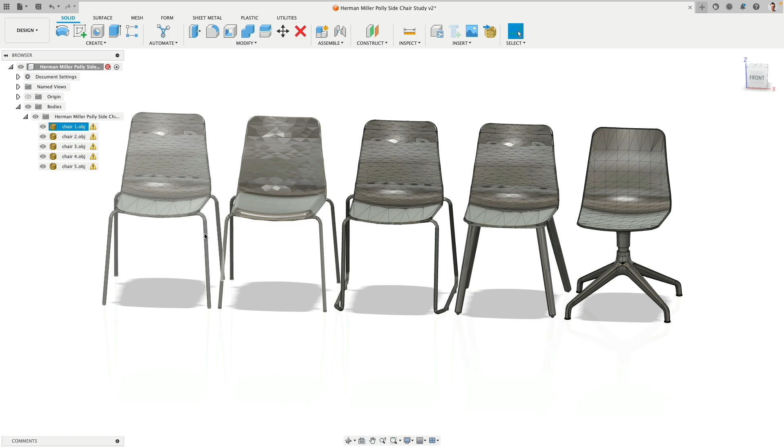We can see here we have, for example, a normal leg base, a sled base, a wooden dowel, a star base. And if we look from the bottom, we can see how all these elements are configured to be structurally sound.

These files I actually got from the Herman Miller website. They are available in different formats. I downloaded, converted them, and then scaled them down to the size for a child, in case you later ask yourself about the dimensions, because these models are smaller than the official versions.

To work along, the reference file is available and the download link is inside the description of this video. So please go ahead and download it. To open it, simply start Fusion, go to open, navigate to where you downloaded the file, and then you will see this. Perfect, let's get started.

So we will start with chair number one. If we look at it, the first thing I would do is try to study it. I'm paying attention to the legs. I can see the back one is less angled, the front one is more angled. They have rounded corners that follow nicely the curvature of the shell.

There's a curve, this is constructed, and we have rounded edges. The backrest itself, as we can see from this view, gets more narrow towards the top.

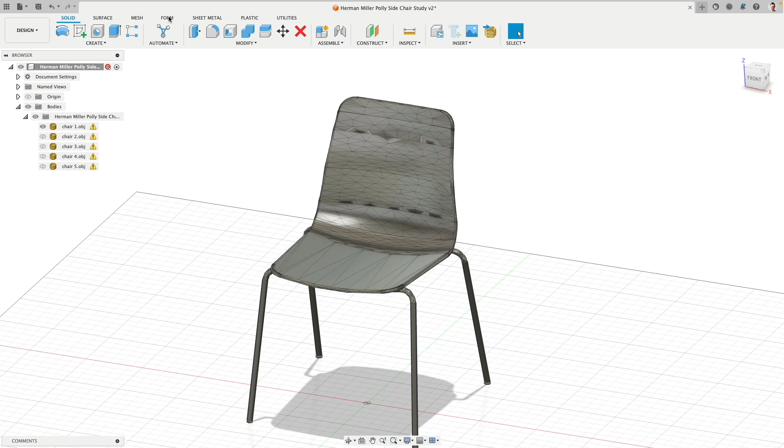This shell looks very complicated because it's very organic. It is actually very easy to create when you're using T-Splines or subdivision surface modeling. In Fusion 360, we have this when we are inside the direct modeling mode.

Now you can see the timeline is actually turned off. We can get this inside the Form menu. Here we are. We have all our basic primitives, some basic modeling tools, and then more modeling tools here in Symmetry. I will go over how to use all those.

So we will start with a plane. Think about this as a piece of paper, which we're going to extrude and bend into the shape. So we're not using sketches for this, we just direct-model that shell.

I click on this part, click on the bottom sketch, and then simply click on the center. From the beginning, I want to work symmetrical, so this is important. Drag this one out, how big this is doesn't really matter. Then left, right, I drag this to the left, and then this one to the right, so I just have one rectangle. You should see faces 1, 1, and okay, very good.

Perfect, then I can go to Edit Form. This is now the main tool to manipulate this geometry. We have various transform modes, coordinate systems, and do I work with a point? This is a point. Do I work with an edge, with a face, or can I select all at the same time? I would go with this one.

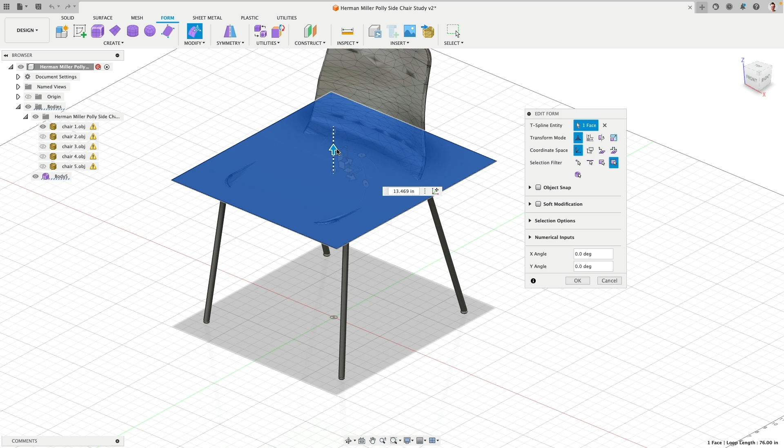So I simply click on this face, and then I can move this one up. There we are, and I bring this up to the front corner. Then if I go to the top view, you see here I can scale this. I will go to kind of like the width at the hip area.

Very good, now I click on this front edge, bring this back, click on this edge, and then bring this one back to here, kind of like. And then I go to a side view, roll this down. Okay, this one now actually can go up a little bit.

And you see how I'm trying to lay these edges and align this with the flow of that. Yeah, kind of like this part. Good. So now we have a nice, beautiful rectangle. How do we get this into this nice curvature?

The next step is very important. We go to a side view. On a Mac, it's the Option key; on a PC, I assume it's the Alt key. You have to press and hold it, and you see here there is a rectangle. This only allows me to move this point up, this point to the right, and this one goes up and to the right, or sideways at the same time.

So hold the Alt or Option key, then click and drag, and you see it drags a new piece out. I go to the midpoint here and release the mouse. I still hold the key on the keyboard, one more time, one more time. Middle mouse button, scroll up, one more time, and I try to release it there. Okay, now we can release the keyboard too. And there you see we extruded out this kind of organic form.

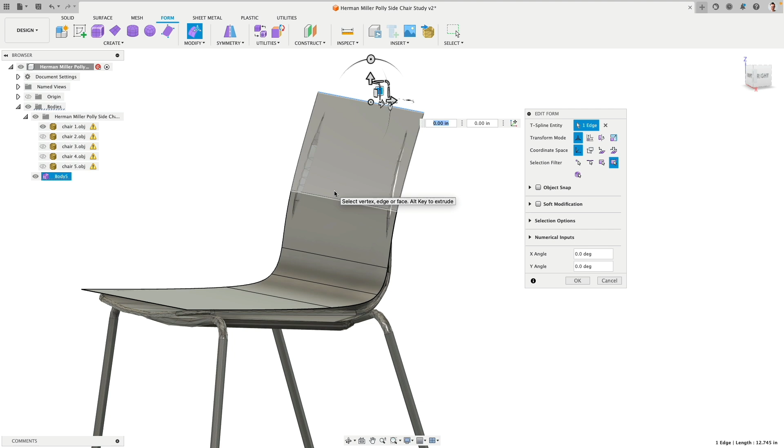That's the nice thing about T-Splines. Think about it like you're working with a flexible material which we can sculpt, like wire mesh modeling — this is actually what it is. Because we have all these edges, we can manipulate the topology.

So, for example, we see that this edge got a little bit higher, so I can select this and move it down a little bit. This does not really fully flow where it should be. So I go to a side view, and now what I have to do is push and pull everything and then reposition it till I get that flow I'm looking for. There, sometimes we have to move them up a little bit.

So it's kind of like a piece of plastic. Now, if you bend it, it always wants to de-stress itself, which is why I need to figure out where to put this. I'm going to make this arc a little bit bigger, and then here, this I will move up a little bit.

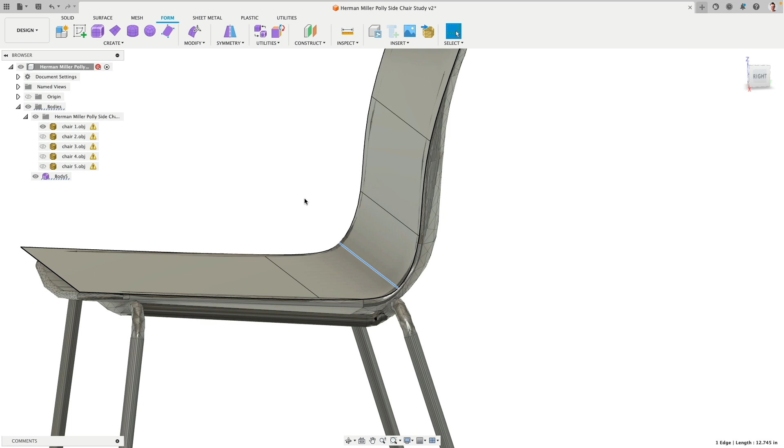Very good. When I select this edge, I can also press delete. Probably have to stop this edit mode, cancel it, and then press delete, and you see how this edge was removed. We can also add a new edge — insert edge.

Which edge do I have to select? This one. Wait, that's not the way. Here, there, okay, this thing goes that way. That's not what I want. There, okay, there you can see how we can now slide, cut a new edge right in the center there. And then you see how the whole geometry updates again.

So we can extrude new geometry out and by this create new edges on the fly. Or as you see what I did, we just simply add new edges on the go afterwards. Very good.

So I think we are pretty close to say this is actually really good. This would be perfect, for example, if we just want to have a very simple bent plywood shell. There is a thicken command — there it is. And that extrudes or thickens this. So we take the shell and give it a specific dimension.

We want to, however, create this nice curvature. How do we do this? Well, to bend, for example, this edge into this C shape, what are we missing? We are missing points here at the center.

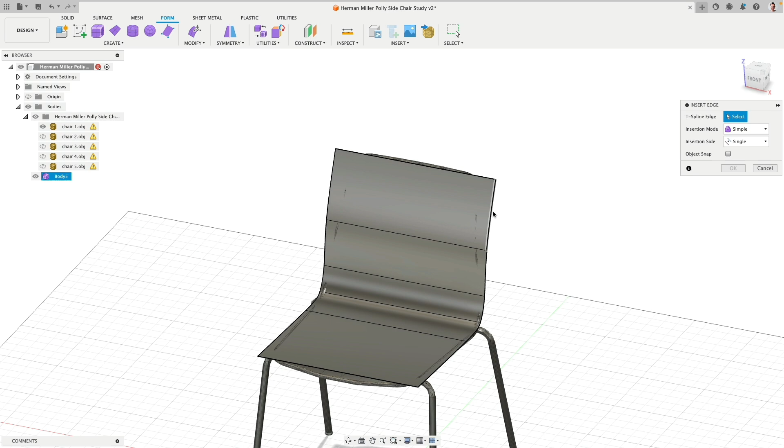So let's go ahead, go to Insert Edge — that's not the edge I want. I select all these edges. I think there we can click on all those. 50%, that's very important. You see, when I slide this, it goes from 0 to 1, so left or right, and 0.5 is exactly the center.

There we are. And with this now, I go back, select this edge, and just start pulling it down. And I can pull this point down, pull this point up again. So this will be a little bit of forward and backwards till we get that flow we are looking for.

Maybe this has to go down a little bit. Yeah, there we are — a little bit down, a little bit up. But as you can see, it's only a matter of some time and tweaking till we have really the result we're looking for.

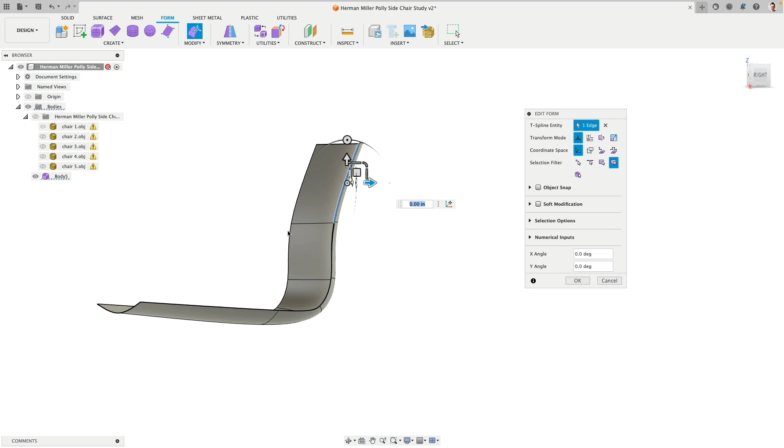Now here, these edges, for example — here I select these two edges, move this forward there. So now we are at this rim. Now we can pull this back. Yeah, okay, good. Maybe hide the mesh, then we can take a look at the design we have. It's actually not too bad.

Here's one problem with the topology. I'll move this a little bit more over to here, and maybe this over here. What I'm trying to do is make these edges perpendicular to their other lines. See, that's perpendicular, perpendicular. That helps later with having nice, even topology. The cleaner this topology is, the smoother and more perfect our surface will look later.

I'd say the shell is, in theory, good. What's missing is, well, as we can see, it doesn't really work perfectly. So now what we have to do is fold these sides over. The problem is I have to do this on the left side and the right side, which is a lot of work and can invite mistakes.

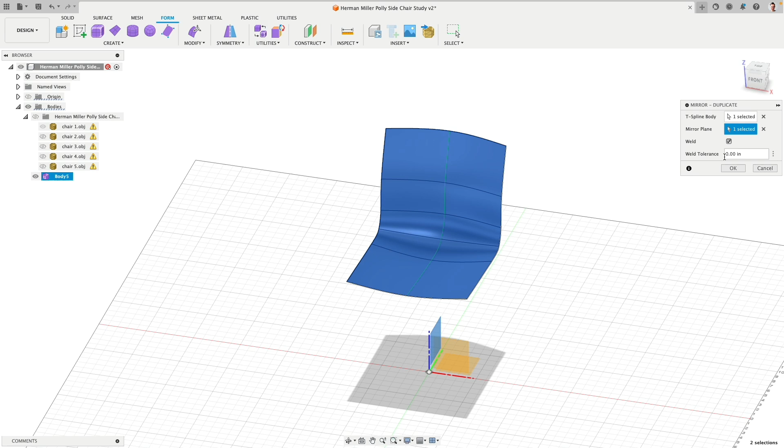So I'm selecting the edges here and pressing delete. Don't worry, we just removed half of the model. Then we go to Symmetry, Mirror Duplicate, select this body, and the plane is here. That's the reason I started modeling from the center, because this mirror line goes along this plane. We can also do a weld, so it's one piece, very nice. If you have a small gap, there's a tolerance to snap these edges together. Works really good. Click OK, there we are.

Because we have this interactive symmetry, when we select one point, you see the other point actually reacts to it. Okay, this is a line.

Instead of moving all these points in, I'll select all these edges and look from behind, that's easier to see. I want to reposition this pivot point, so now I can put this there. Click OK, thank you.

I am going to rotate this now. You see how all these edges rotate exactly nicely together. Very good, there we are. Cool.

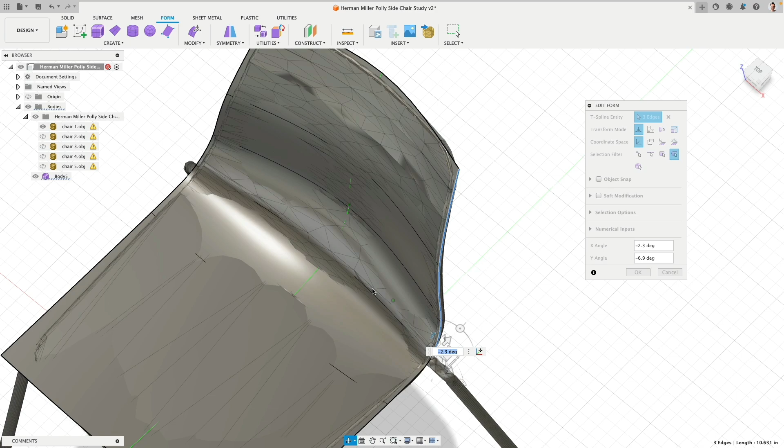This won't make the design follow the surface as much as before, that's good. Maybe a little bit of rotation here. Very good, yeah, that's good. This is our first time doing this, so we don't have to be super perfect.

Then here, this one I actually bring down and move forward. By bringing this down, you see I'm creating this C shape. Beautiful, okay, so we do the same with this one.

So reposition the pivot to there, thank you, rotate this, there we are. Let's go to a side view. Yeah, looks good enough. Maybe just a notch of rotation, and if this is too much, we can manually enter the amount. See, even half a degree has a good impact.

Beautiful, look at this. Such a complicated shape, rebuilt very easily with a methodical approach using T-Splines, doing subdivision surface modeling. This is very similar to the way you work in Blender, for example. It's just polygon modeling, to be honest. This is polygons? Yes, it is.

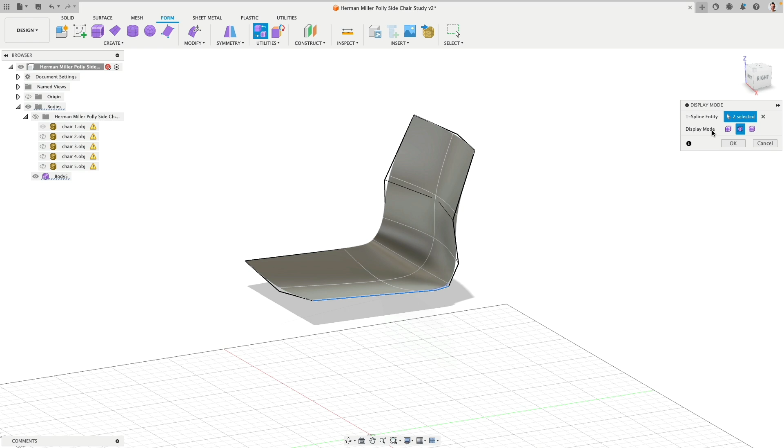If you go to Utilities, Display Mode, and click on this, we have three stages. That's a raw polygon model, this is what we built. Then this shows the smooth version including the original cage, and then this is the smooth display. Perfect. I switch between these quite often to make sure, for example, that lines don't self-intersect.

Okay, perfect. So what can we do now to build the shell? We folded this T-spline surface over the top of the chair, so now we can use that to create a solid.

We have the Thicken command here. I click on our T-spline surface, and I'd like to go to a quarter inch, or maybe 0.3 of an inch... 0.4. Now with this, you can specify how thick this material should be.

So now there we have it, nice and evenly thickened.

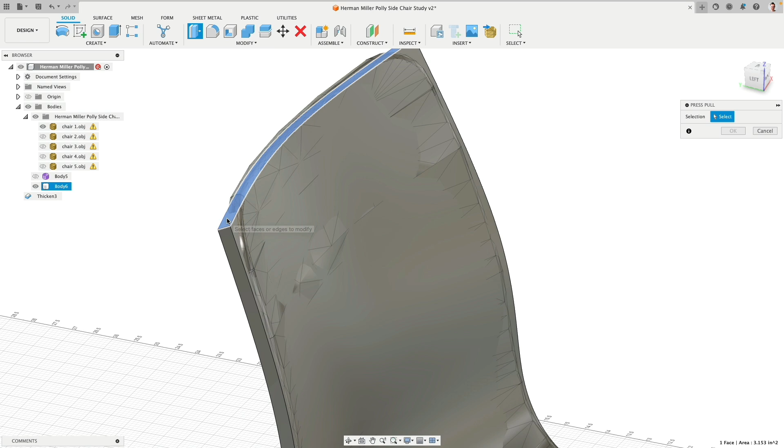To make this shell less painful, we can round these edges. I'm a little bit off here with that surface, so I can go to Press and Pull, select this face, and move it up a little bit. Yeah, that is actually good. Here, maybe... oh, hold on, what are you doing here?

Stop, I was still in that command. I didn't say this was okay. Good, I guess I can do this one more time. There, extend this a little bit. You see, this is very easy. Click OK.

We're actually very close. So to round everything, we select these 2 upper edges, go to fillet, and simply round it. We can pay attention to how big of a radius they have here, till it matches what we have. So it looks like 1.5, maybe 1.6. Yeah, it looks like 1.5 is what they used.

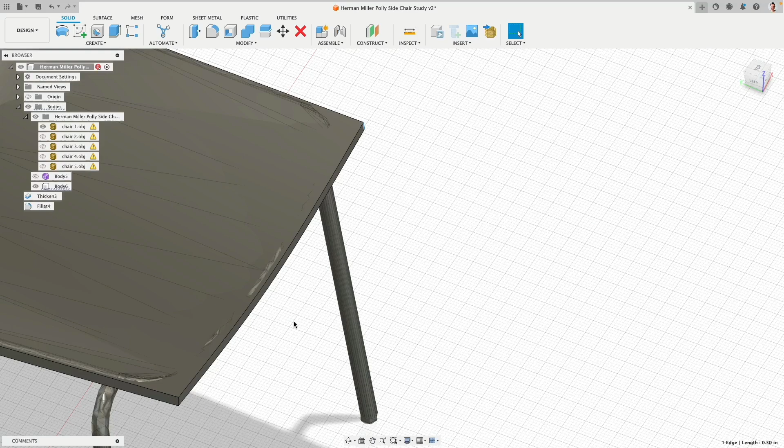Our basis, or our shell, is a little bit wider than theirs. That's not really a problem. Then we can go to the front and do exactly the same here. Again, select these 2 edges, fillet, and round this. This is actually bigger, looks like nearly 2 inches. Cool, okay, beautiful.

Now sharp edges, please. We select 2 edges. Tangent chain is turned on, which is why you see these closed blue loops. Maybe 0.125 divided by 2, enter there, like a really nice fillet. This looks good. Actually, our shell is done. There we are, look at this. This is beautiful.

Because we are in direct modeling, not parametric modeling, what we can do now is actually make a variation of this. Copy and paste. Maybe I would like to create a thicker version. So just for demonstration purposes, let's say we go with 1/2 inch of material.

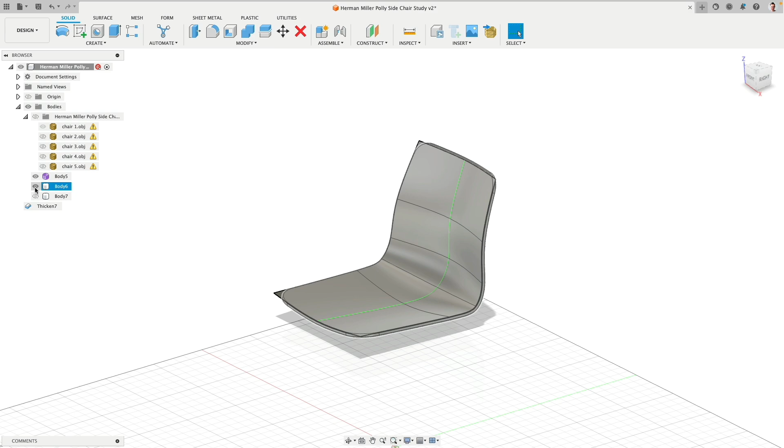And you see now, we essentially make a new model and we can compare these individual versions. We can keep this inside the design to kind of document what we explored. And if something is just not making sense, like this one, we just delete it, take it out. Very good. And then here, this one we can call seat shell.

Beautiful, okay. Now let's take a look at how we can do the legs. They might actually look very complicated. This is at an angle, this is at an angle. If we look from the side, it looks straight, slightly at an angle, and then there are arcs below which perfectly follow the seat shell, and then we have these horizontal pieces.

That looks intimidatingly complex, but in real life, I, for example, would select the shell and then take tubing and try to bend the tubing till it follows, for example, this curvature perfectly.

We're going to do exactly the same, just via sketches. I will show you what that means. Works very easy. In general, the way we work in the woodshop, or in the prototyping shop, is also the way we can approach 3D modeling, because in the end we have to produce this stuff anyway. So use the tools and methods and think about what the digital tools represent from the prototyping workshop.

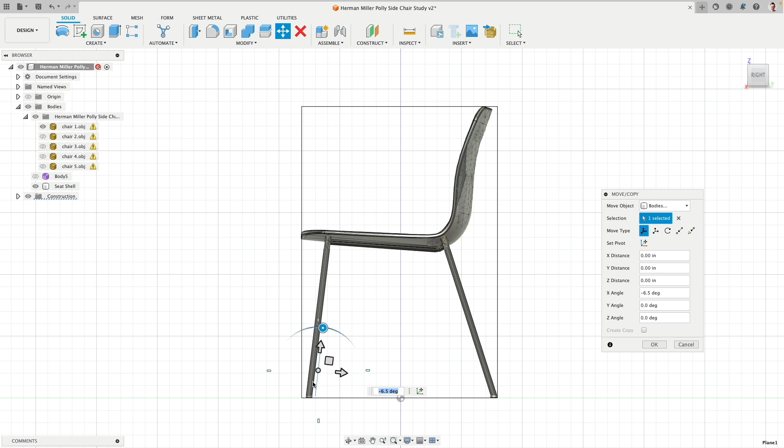Positioned it kind of on this edge, so I can see to what degree does this line up. Oh, this looks actually good. And then I try to center it there. Okay, yeah, that worked actually pretty good.

If I now select this construction plane, I can create a sketch now on this plane. You see, there we are. Go to the front view, and now I will try to draw here my line.

So roughly here, I would say, is the center of the leg. Then this goes down, plus or minus, to here. I make this a little bit longer. That's all good, and there we are. Very good. And I quit my sketch.

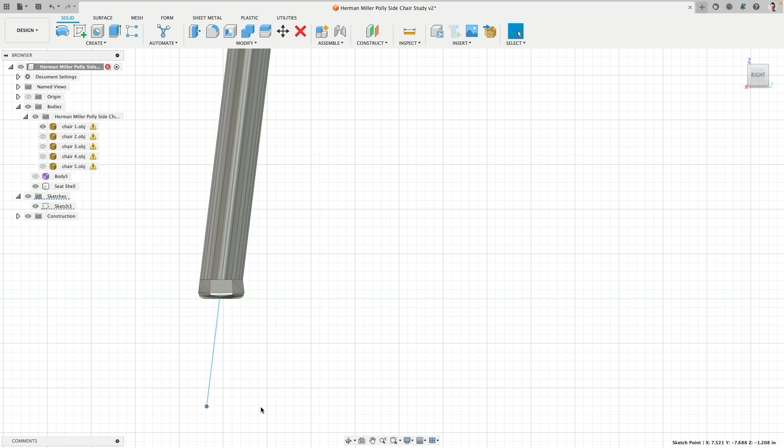I can go to the right side. I see now this is a little bit too low, so I can click this point, press M to move, and then I slide this one up, kind of like to there. We're not trying to work too precise, we're trying to work actually rather fast. And the main reason for that is I want to explore the ideas.

And then here, this one I extend up. I pressed M for the movement command too. So this is kind of like a line that's in the center of my leg. How do I do now the pipe below? Because later, look at this, we have here a pipe command, and I need to draw something that I can grow this pipe along.

When I go and edit the sketch again, we can see how this construction plane cuts the shell. Can I trace that? Now we do a lot of tracing in real life, and yes, actually there is something - it's simply called intersect. I intersect this plane with this geometry. Okay, and there is actually my thing I was looking for.

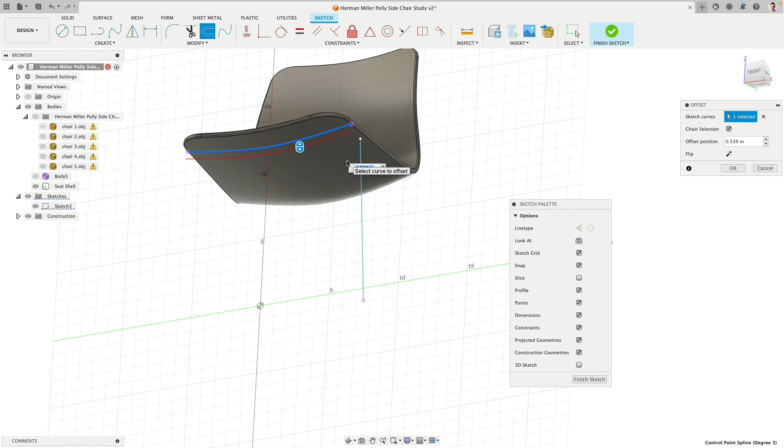Now the pipe, we're going to make 1/2 an inch. And this actually then needs to be offset 1/2 of that, so 1/4 inch. Is there an offset command? Yes, there is - there's the offset command for sketches. Can select this, bring this down, 0.25 of an inch. Beautiful.

Very nice. Okay, now I will take a look at kind of like where this arc later ends. We can see this, so roughly there. So that means I need to trim this line there. I'm drawing myself here a line just as a helper, plus minus there. And there's the trim command, so I use this line to just trim this piece off. Suck, cut. And this I can delete.

I can also, if I want to work clean, do the same there. So there, this is gone. And now this piece I do not want to move at all, so I select it and say fix, lock it. Also this point I don't want to move - there, I lock it. Okay. This is blue, so this can still move. Why did I do this?

Check this out. Here I will come in now with my arc command. Click, click, move this up. Click. There is a tangency, so this arc follows tangency into this line. And now I want this arc to flow G1 tangent into this offset curve. And when I click it, you will see - wow, what happened here?

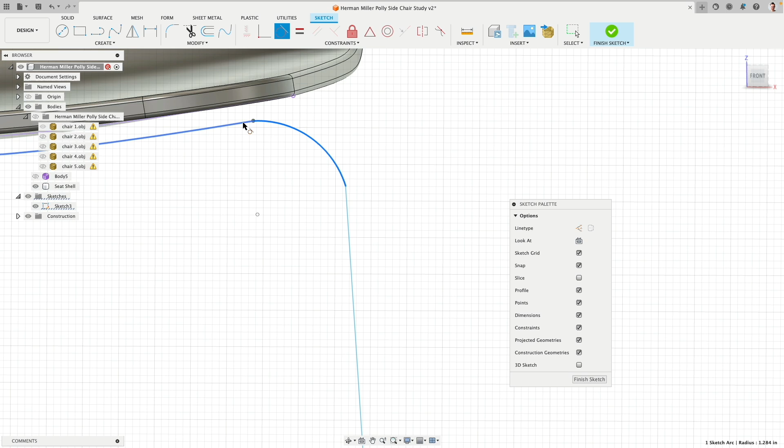Okay, let's delete this. Let's do this one more time. Sometimes Fusion can be a little bit cranky. There and there. Okay, didn't do it. Yeah, I love this when this happens. This is perfect.

Okay, maybe I try something else. Okay, I'm not going to re-record this and fix this because I think bugs are something that will always follow us. So it's good to show you how I solved that problem.

So you see how I drew actually the arc and the line, and then I established the tangency constraints. And can I now bring this down to this point? Yeah, okay, so this glued together, this line I can delete. There's still a little bit of a broken thing, so don't touch this. Okay, interesting, so there's still something breaking. I have an idea maybe why this is so.

First, actually, let's give this a radius. 1.5 - does this actually look similar to 1.5? No, it's actually maybe 1.25. Maybe actually it's just 1. No, this is too small, 1.1. I'm trying to pay attention to, yeah, there this ends. So this looks actually very similar. Goody, okay.

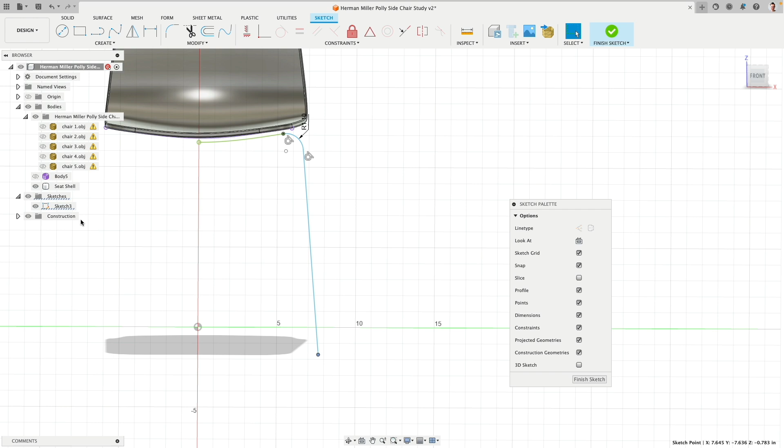So this actually still works, so I will simply do the following in this case. Now you see here this line is a little bit longer, I just repositioned it. Thank you, this is good. Okay. I leave the sketch, I go to a side view.

There you can see how this works. Let me show you actually another little trick. I will create a sketch. No, not there. So the sketch I delete. I would like to create a sketch on this plane. And then here I just make a line and I make with L another line, and they're horizontal and vertical, they're perpendicular, perfect.

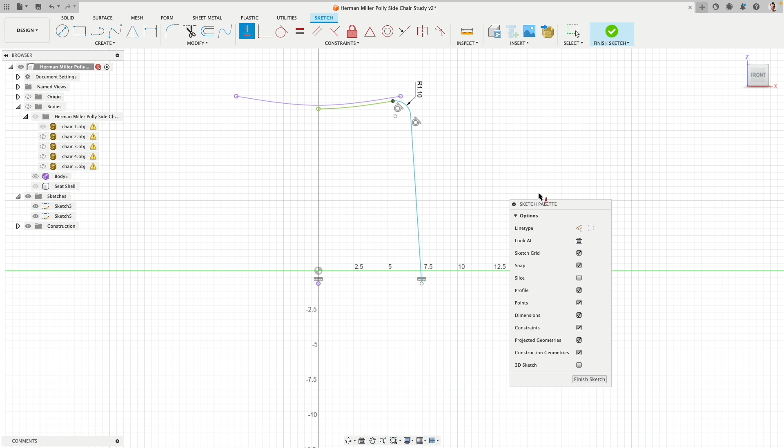So when I do this, it's actually very helpful, because if I go to the sketch for these legs there, you see that this is where the center point is, but this is where the ground is. Can I bring this in? Can I find an intersection? And yes, we can - so intersect this new sketch with that other sketch. Yes. And why is that useful? Because now I can say, hey, you and you be horizontally aligned, and that pulls actually this point right up to the ground plane.

And then all I can do is move this left and right to change the angle. Welcome to CAD - there's always multiple ways how you can do this. Okay, so this is done. Here's the pipe command, we can click on this. 0.5 of an inch - that shouldn't really cut. It's cutting there somewhere, or maybe it's just really touching it. It's fine - new body, flop. There we are, you see, easy peasy. And if we go to the side view, that's really nicely touching the ground.

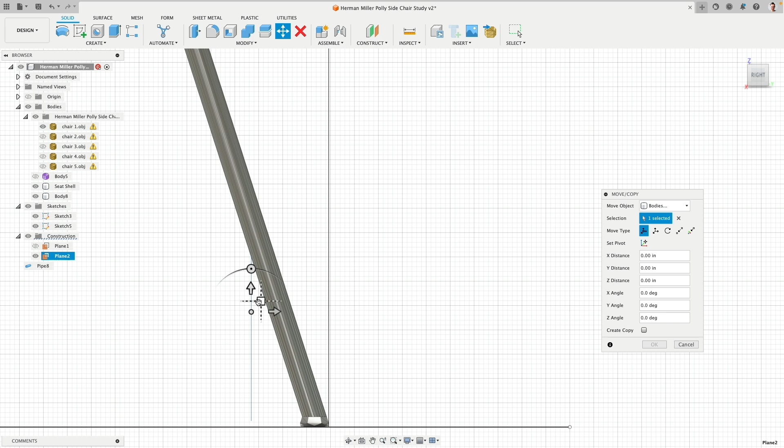Okay, let's actually do the back leg - same process. We can make a construction plane, bring that over. So now there's that construction plane technique we did. So make a new construction plane, this one, bring this over. Okay, then I can select this plane and from a side view, position it and rotate it. It's easier to see this on the outside.

Close, there we are. And then we try to center it. Okay, same deal here again. So I will create a sketch. I will from the beginning do also this intersection. Then now we need to draw this line, which goes to maybe somewhere there. Okay, very good. Since we have now this point, we can.

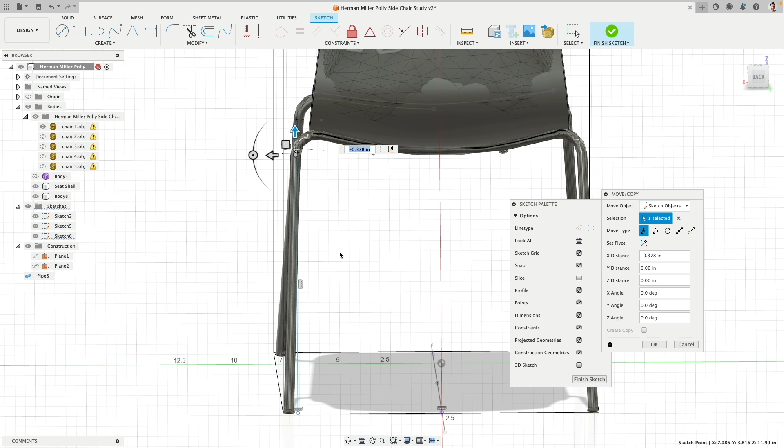Horizontally, vertically constrain it. With M, we go to the move command, bring this over. Very good. Press M. Now I'll move this over and maybe move this down. Oh, when I drew this line, I actually added a vertical constraint. It always just moved it left and right.

There we are. Thank you. Cool, okay, now we need the same intersection, tracing actually the bottom of the shell. There we are. And you noticed exactly same process. That's really the nice thing about 3D modeling. You need to learn how to create the basic shapes, and then basically once you master that, it's honestly just taking a look at what shapes do you have in front of you and how can you use the available tools to rebuild what you have.

Fix it, very good. There's now my arc command. Click, click, there we are. And tangency to that, let's see. This time it doesn't flip out, cool, thank you. You notice I wasn't really able to select the arc. I needed to turn off the mesh, turn it back on.

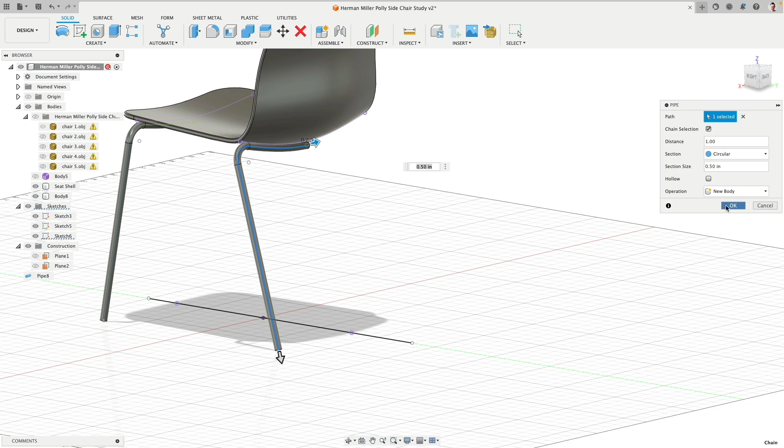1.25. Actually, 1.1, oh yeah there, let's go 1.1. That's all good, perfect. We don't want to rebuild. I mean, the goal is not to rebuild this perfectly. This is really more learning actually from these designs, how something was built. There we are, look at this. See, it's not very complicated.

Also, these legs that you see from the sides is all flat because it's going to be put onto a vise or system, and then we just bend them into the position we need. So these pipes don't go, they're not bent in along two different axes. It's just one axis only.

How do we do the connection part? That's actually very easy, same process again. Construction plane, this time I use this one, and bring this to connect the center. There we are, thank you. Now, and then same way, sketch on this construction plane, intersect this shell. Thank you, there, go down 0.25. There we are, and that's actually all we need.

We're not going to trim the stuff, I show you how we trim the geometry. Then we're going to shell this a new body. Now every engineer is going to laugh at me because it's exactly the same the dimension. No, the pipe, so diameter is the same.

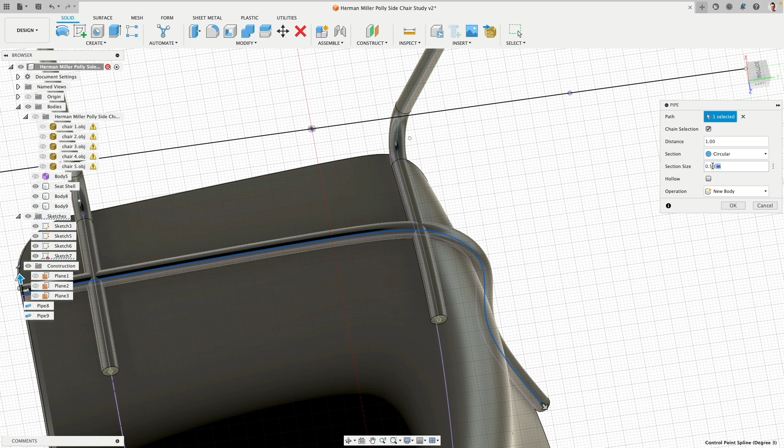I mean, we can do it this way. We're actually going to make this a tick smaller because you can see what will happen where these two pipes are meeting each other. So now this means if we actually make the pipe smaller, we can drill smaller holes into this lead pipe and then weld the stuff in it. If we make them equal, it's a little bit more complicated. Yeah, I mean, this is fine, it's all good, okay, beautiful.

These pipes I all dissolve. Very good. And the shell I hide. So now we have this system. I go to combine and join everything together. And then I simply do the following: to remove this, I select the faces and press delete. Thank you, direct modeling.

Look, it repairs it for us. Perfect. It's kind of like using an eraser. We need to mirror this over. There's the mirror command. There, and along there, and join. So it's one piece, thank you.

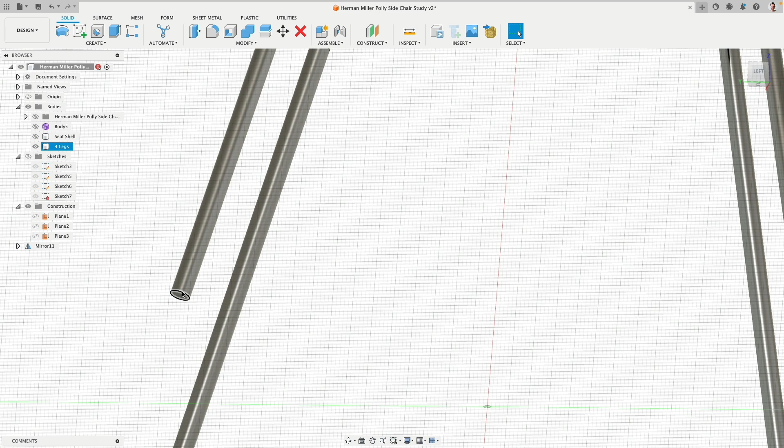Four legs. And the last thing maybe to do is we can select these edges and then do a fillet. We're simulating, for example, that there is actually kind of like a cap. Maybe 0.125, okay. And there we have it.

Now, so this was actually not really that complicated to do, because we have the shell and the leg, and the shell is done, so we don't have to do this for the other chairs. And the configuration we did for this leg, now we can just turn on and off, turn on and off. And this is now where, for example, the next step comes in very useful. So here I would like to, for example, create an upholstery, no?

So how is that possible? I turn the shell off, and I'd like to see this, and then I'll go to the thicken command. I use this, and I'm pushing this up till, let's say, it goes over kind of like that part. Okay, that's kind of okay.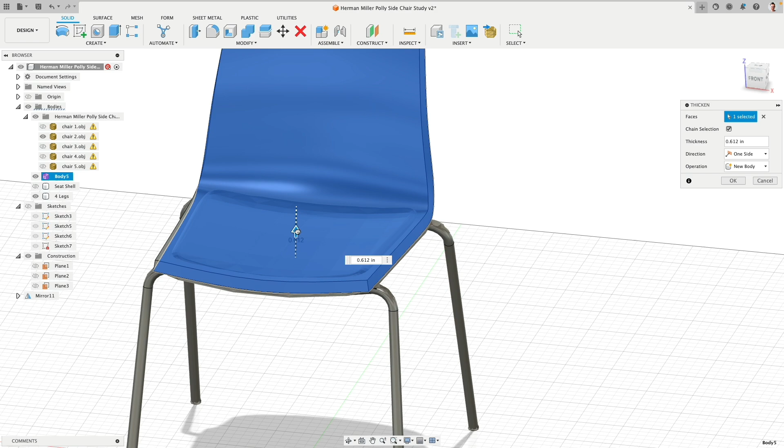And then this one here, I will go in and push and pull and bring this back. Make this smaller. We're going to save ourselves some time.

So this body I will split by this plane. There we are. So I can select this body and throw it out. And then here I will push and pull this back. You have to be a little bit careful, not too much.

There. Okay, now here we have an edge. Yeah, okay, let's round it. There we are, let's make this nice and round. 1.125.

And if we look here, so there is a cut. How can we take a look at this ideally really well? I go to the side view and then I go to inspect and say section analysis. Click on this plane, rotate my view, flip this. Thank you. Go back to this view, click OK.

Maybe I turn this one off. There I can see well all that crazy junk that's inside the model from Herman Miller, but also the angle here. Okay, so that's very useful because I can go ahead, make a sketch from this view, and then simply draw a line.

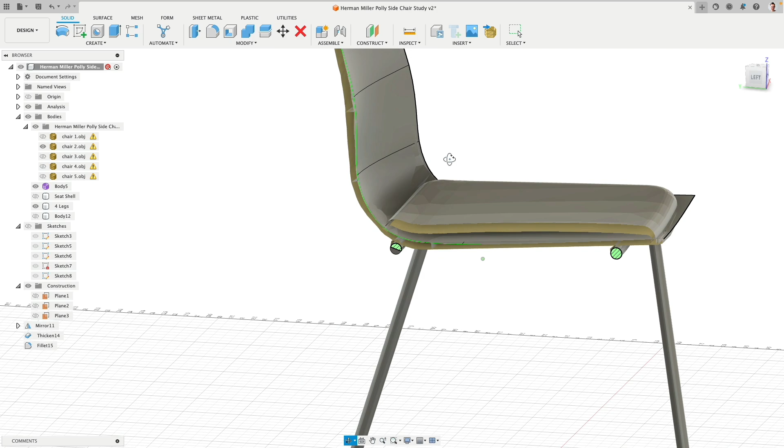Kind of like perpendicular like this. Okay, I think sketches were hidden. There we are. The section analysis, I can turn off. I can turn off this. I can turn off this.

There's this half piece, and I use this sketch as a tool to split. There, see that now? Click. There's that body that can go. This sketch here I created, I can delete, don't need it.

Yeah, and then I go ahead. Let's actually round this carefully. There's a little bit of an issue. The surface is slightly intersecting with each other a little bit, so you might have to be a little bit careful. Up there, it still did it. Very good. Right click, repeat, and then we do a second filleting task.

Bring this down. Oh, I need to actually see where my shell is. So there, okay good, that's wonderful. So the upholstery is actually intersecting with the shell, I think. Oh no, it's sitting right on it, so that's perfect. Oh, and then here, mirror this one along this internal face, join, thank you.

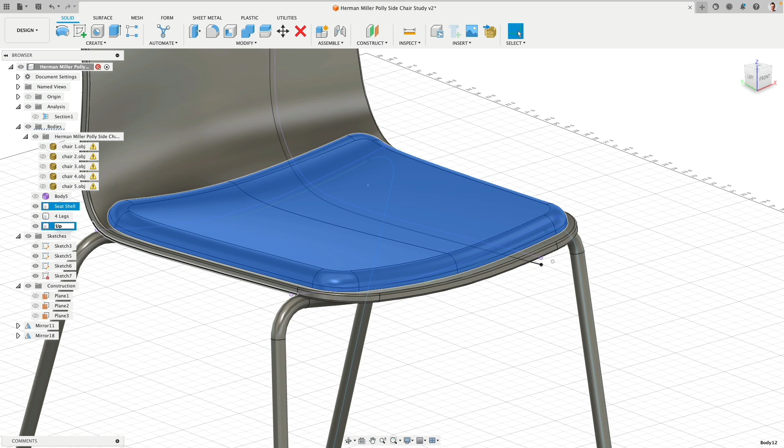Upholstery. There. And now we used a different radius here, so this is a little bit smaller. If we made this bigger, it could follow this a little bit more. But you see, for the rest, now it follows actually the curvature really well.

So super easy, we essentially reuse what we created to continue working. So we don't have to always start from scratch. Work smart, not hard. I mean, you should work hard too, but you shouldn't make it unnecessarily complicated.

So this one is good. This one is good, we can hide those. Can we actually create folders there? No, we cannot. So you see here we have lots of sketches now. At one point it makes sense to give those names.

These construction planes here I could keep or delete them. The mirroring here, this actually I will dissolve. So all this is gone. And we are actually now ready to take a look at how we can rebuild this.

We will simplify this a little bit. There's a change in direction here. And I will show you a technique how we can build kind of like a sled base by using actually a 3D body along we pipe our, well, sled base.

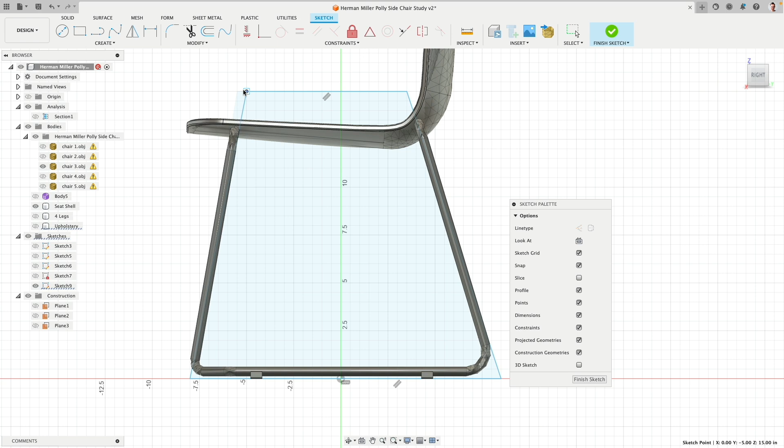You see how I am actually creating from a side a sketch that plus minus captures kind of like this design, huh? Yeah. So, and then this, yeah, I think I can drag this one up, this line, and you see if I zoom out, the sketch actually gets bigger or smaller.

I could, for example, bring this line right up to the midpoint, which probably is plus minus here. Or to be really precise, there. So this is now on the ground. Give me one second, let me perfect actually. This is centered and

this is centered. So now I could go with the move command and actually move this up by half of an inch. No, quarter of an inch.

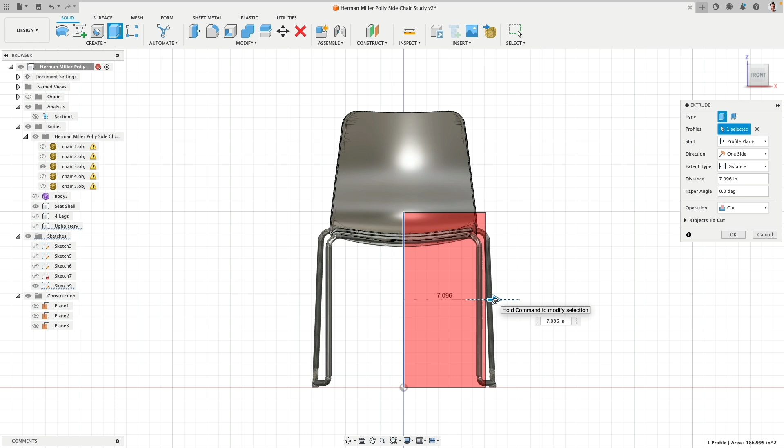I'll leave this actually right now, I'll show you why. This piece is actually good. Now we exit the sketch and extrude this out a little bit till, let's say, here. So roughly there. It is cutting, so make sure new body.

This goes straight down. We can rotate that face, along this edge here. I don't really know how much. Negative 2 degrees, yeah, that looks good.

If we want, right click repeat, then there along this back edge, we rotate the... oh no, that was the wrong rotation widget. Come on, there we are. Here, I need to use this one. Oh, I hit this pretty good. Okay, there we are. That's good enough.

In a previous task, we actually, kind of like with a digital pen, retraced the shape of the shell. And we will do something similar.

We're actually using this shell or this surface to split this volume. So, split body. This is my body to split, and the splitting tool will be this one. That should perfectly work. Yeah, it does. Okay, so this is the leftover. Look at that, pretty nice. It does actually work really good.

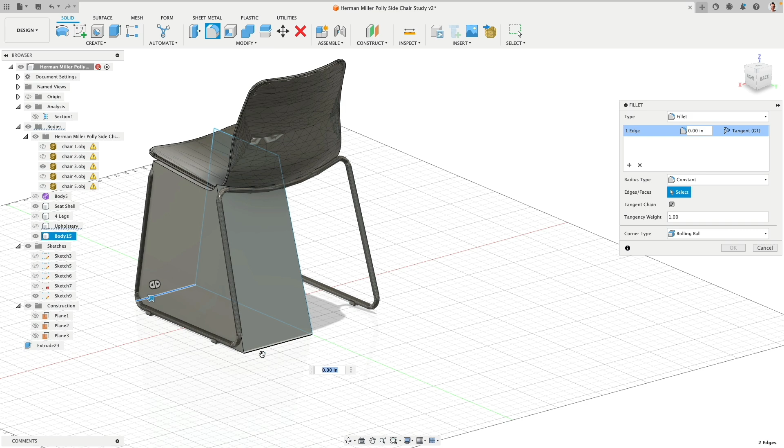There we are, okay. The front edge is a little bit too big. I can click OK, and then I go to press and pull, select this fillet, and then simply bring this back, say 1 inch.

Yeah, okay. And so, because this means the pipe comes down there, and now it should go over to there, which means I have to round now this edge.

And there I'm rounding it. Oh, nearly made a mistake. This is flush under the shell. I need to move this down.

Kind of like, with the sketch, we did an offset of that curve, and now we do the same here. We do an offset, minus 0.25. Thank you, nearly forgot it.

So we have enough surface for the pipe actually to run under it. There you see that, no? There's actually our 3D sketch. I just don't create the sketch.

Traditionally, I simply make a 3D model and I use the edges as a 3D sketch. This is actually flush on the ground, so we have to move this up.

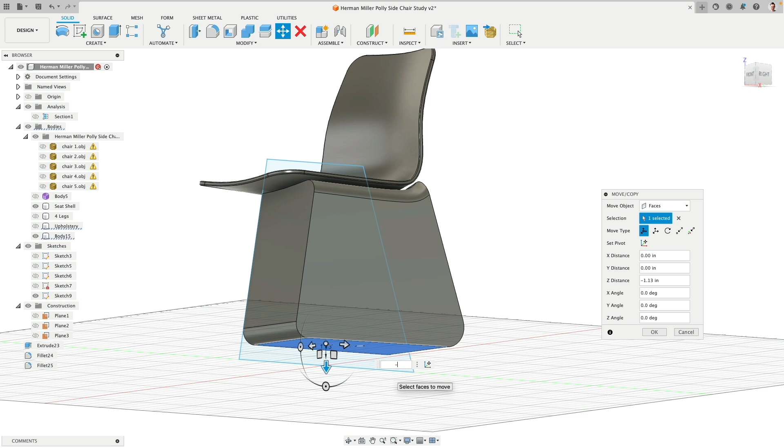You see, I can actually do this too. I select that face and I can move everything up and down. So minus 0.25, lifting this up. So the sketch is actually really my basic parameter volume, and then I solve the rest via 3D modeling.

And there is the pipe, 0.5, and as a new body, okay. There we are, you see? Super easy.

All that's left is, well, we need to make a mirror. Mirror, this one, along there, join. And there is now our sled base. So this piece here I could call a sled base volume.

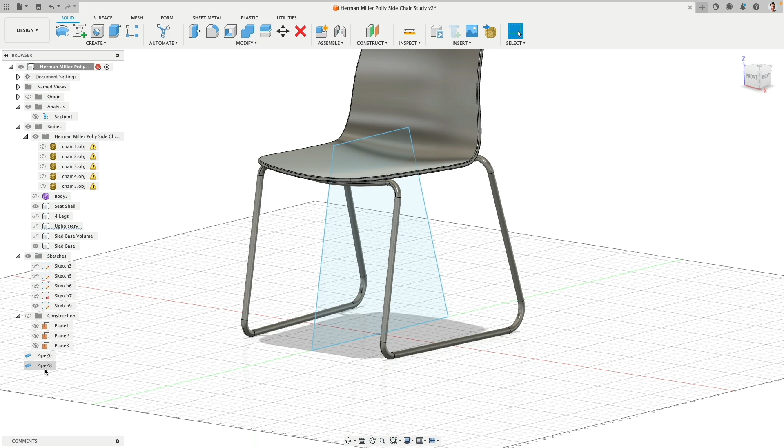Just keep this simply as a reference. So if I want to create different versions of the sled base, I could always go ahead, modify this part, and then always produce another piece. But as you can see, this was actually very easy to do, and it didn't really have any complicated sketching involved. This worked really, really well. Look from the top. No, that's respectable.

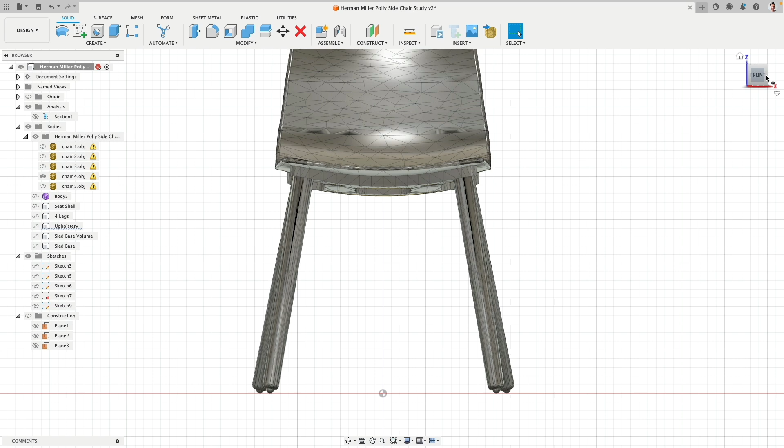One way, and that's the nice thing about direct modeling, is we design the leg one time and then copy and paste and rotate it into position. So let's do that.

I'll go ahead and make myself a sketch. Actually, hold on, before I do that, let me delete that sketch. I'll do the following to make things a little easier: make a copy of this piece, bring it over, and then rotate it. Now I have a nice vertical helper. Let's say like this. Very good. Okay, now I make that sketch.

Here, for example, this goes straight up. I make this a little bit bigger - that's fine, you'll see why later. Then one line over, then line down and back. So this piece has a height. This one I lock so it can't move. Then this one I make horizontal. This is vertical. Very good.

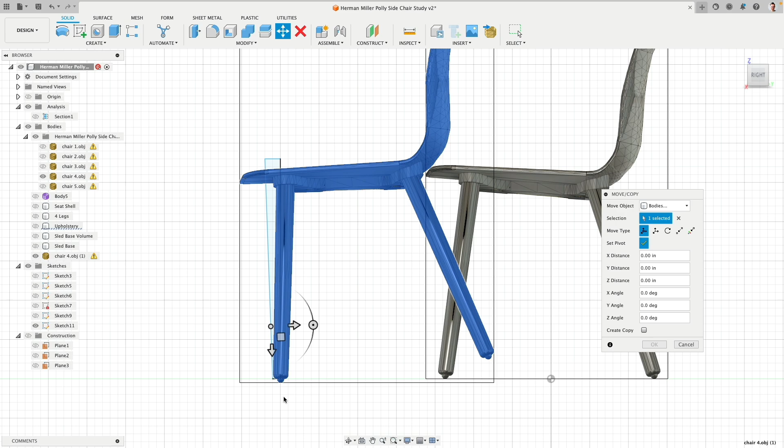I now notice that my model is centered here, but not there. I need to get new glasses. It's okay, we can reposition that pivot to there. Thank you. And then I'm simply rotating this a little bit more. It's snapping. A tick too much - 1.5, plus or minus, that seems good.

So this one now I can click and drag. Yeah, this looks good, let's give this a quick test. So that's my profile, that's my leg. Look, that actually works pretty good. Okay, so this piece we don't need anymore, we can delete it. We have our prototype.

Okay, so this piece now I can select and make myself a copy, move this over to here, and then rotate it there, move this up to there. Go to this view, bring this over to there, and then from this view I'm going to rotate it.

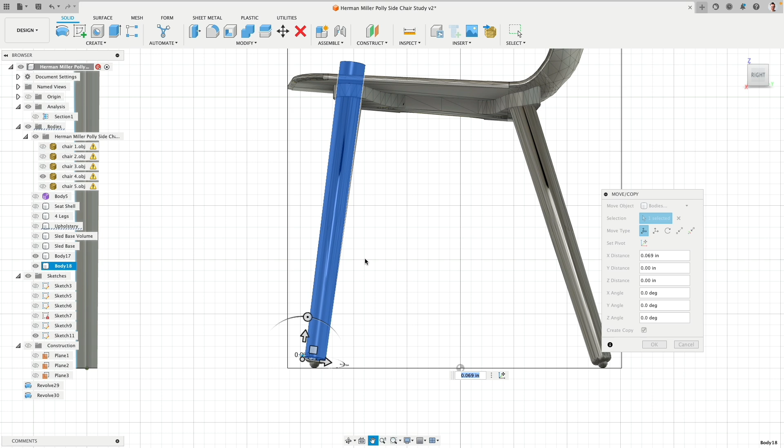You notice that was actually pretty easy. You can create everything with crazy 3D sketches. I come from various 3D programs, so the way I work is a mixture of all of those. This is also direct modeling, so it's not our super precise engineering way of working - we're more quickly exploring ideas, and this is just super fast to do. Perfect, first leg is done.

That's good, then we need to make a copy. This time I'll make a copy of this body. You see how I try to put the widget right at the center of the disk - make a copy, because then I can actually visualize this better, really at the center. There we are, and rotate it.

Let's go to the back view, bring this over, center it. Should be there. And there we are. Easy peasy.

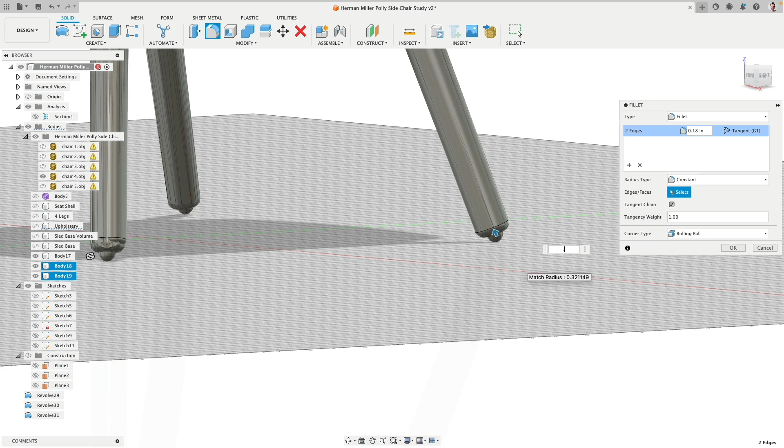This is all good, this is actually rounded - 0.125, my most favorite number. So the legs are sticking through, but that's really absolutely no problem.

We need to have our shell now. So, actually no, we don't need the shell, we need this one. From that one - no, we need to create a new offset surface, but this time we go the opposite way. Look at that. Bonk. I'm 100% sure that when they actually worked on this and designed it, that's how they created this.

Now we go to the bottom, and here we're going to create a sketch. There we are, very good. And we're going to do this a little bit of a simplified way. So I need to have a circle there and a circle there, but now I'd like to know exactly where the leg is intersecting with that shell.

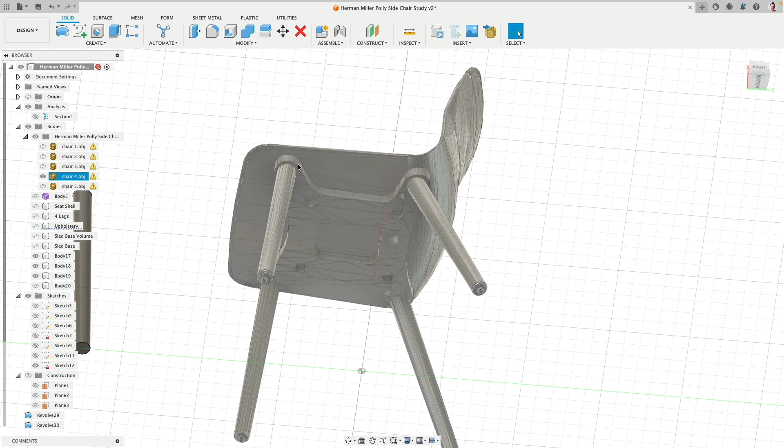So let me show you something. We will do it a tick different - I just realized that, because I want to draw this perfectly where these legs already are. No?

So the first step to do is this one: we split so we have less work. This body we then delete. Thank you. Now I will split by - let's say this surface, that's fine - split by this surface. Thank you, and there you can see already what we have there.

Here's a little trick now. Check this out: I'm making this and this a little bit bigger, 0.25 of an inch. There are my rings, you see that? Ta-da!

That one is in my way. Actually, these legs are also in my way. There. Okay, now it's much easier to draw the stuff.

I can actually project these circles into this sketch. So, project - well, it's like a projector, as you can see - I projected it onto it. And because this is not a circle, it doesn't have a center, I can give this a nice 0.5 of an inch offset the wrong way.

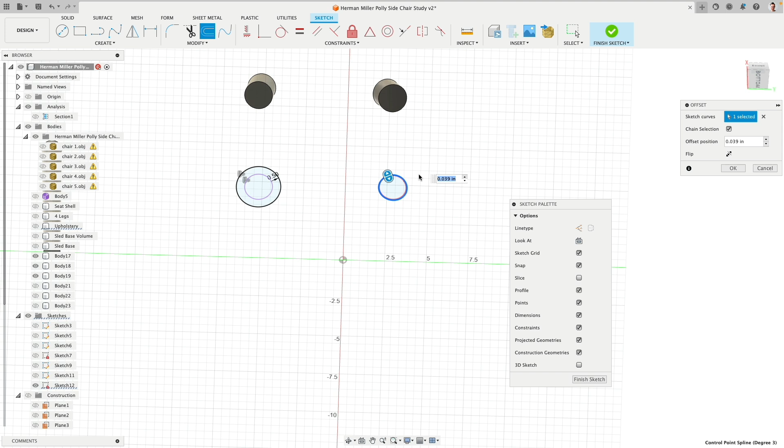Minus 0.5, and the same here. Minus 0.5. Very good. If I take a look at the bottom, let's quickly verify. Yeah, that's a little bit aggressive. Minus 0.25. That is good.

Can we change the view? Maybe just wireframe. Yeah, that's a little bit easier to see now. And where is my base? There. Okay, wow, it got a little bit bigger. It's all good, all good.

So here we draw a line, and a line, and a line, and a line. Very good. And then I draw here a line and a line to there. Very good, so I use the grid. I can also say this point is horizontally constrained to this center, and this line horizontally. And then I will go with an arc from there to there, and from here to there. Very good, yeah.

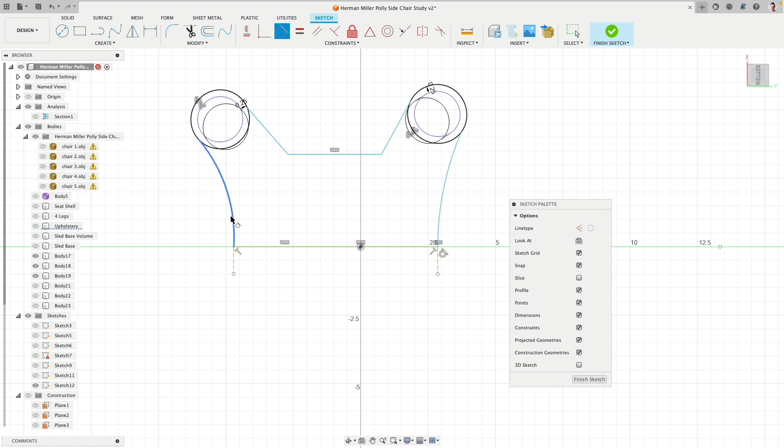Oh, whoa, what, whoa whoa whoa. No, lock this so nothing changes. There, okay. But so I want this actually to be tangent to there. And then it seems not really to work, because properly this is not a real circle, I assume.

So let's do a quick check. If we do something like this, I'm deleting this arc. Again, now this is a good demonstration of prototyping. Yeah, you see, so that actually worked. What do we do now? It's not a big deal.

We can use these as references. Yeah, they're not perfectly circular, because it's not flat. These legs were rotated, so they're kind of elliptical. Let's make them simply a reference. And now this circle, we simply put into the right position.

We can also dimension this, maybe 0.2. Wait, how much is this? 0.2, 2.2. Yeah, that's good. When we press M, then we can freely move this around a little bit more. Fusion didn't fix this, dragging elements in the sketch. There we are, so this is good.

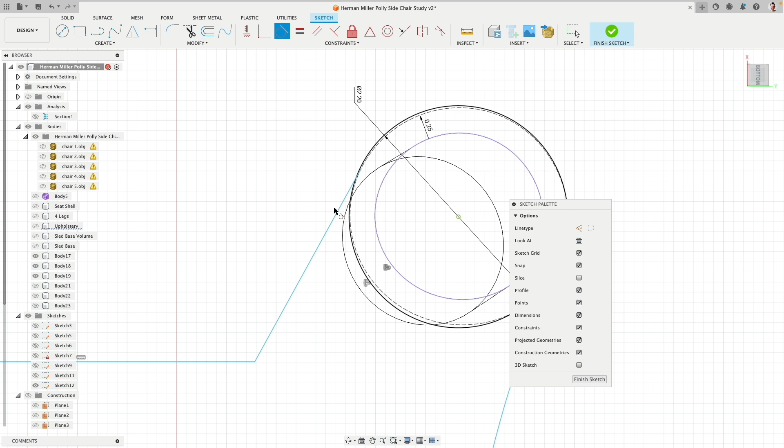And there we have to do the same, so this line I remove and put a new one in, and there. Okay, oh, where is that arc coming from? There shouldn't be an arc. So this piece, what we did here with an offset, honestly we can keep it, or to make the sketch easy to read, I simply delete this there. And those parts, for example, I can make construction so it's easier to see. It's up to you how you want to style your drawings.

Okay, very good, why did I draw these lines? I realized I didn't explain it. So this arc comes down and now goes tangent into this line, which means here the arc will perfectly continue, there won't be a kink. So what does this mean? Okay, one more time the explanation: you can clearly see that the arc is not going to flow smooth into that line. Now it does, and then how it continues will be half of a circle.

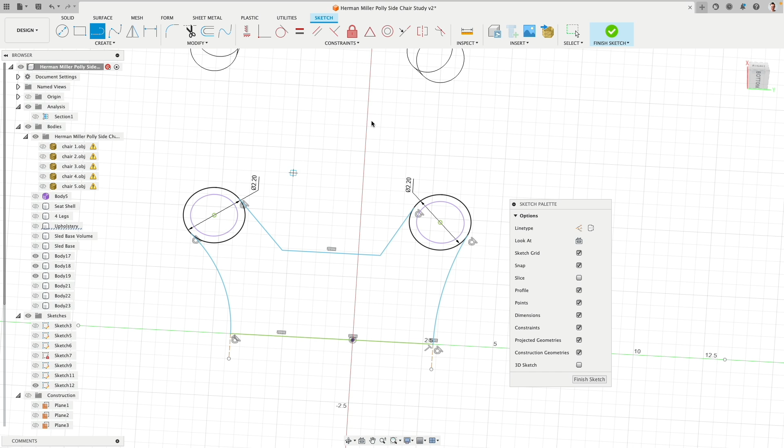That's the whole idea behind it. Okay, very good. We want, now this is all perfect, we can close the sketch, and I think we have all our individual sections. Beautiful. So let's go back to visual style, visible edges only. Go, go, go. Yeah, you, I would like to see.

And now we're going to extrude all these profiles we selected and jam it through that piece. And then we switch the command to intersect. Click OK, and there we are. Where's our shell? There, you see? Ta-da!

Here, these two edges we're going to round. That's the reason why I didn't do this in the sketch. It's easier to do later via 3D modeling.

Where are my legs? There's leg number 1, leg number 2, and this piece and this piece. So these two I delete. Then I need to remove this shell and keep it, so I'm just trimming this down. Now you see how this is now smaller.

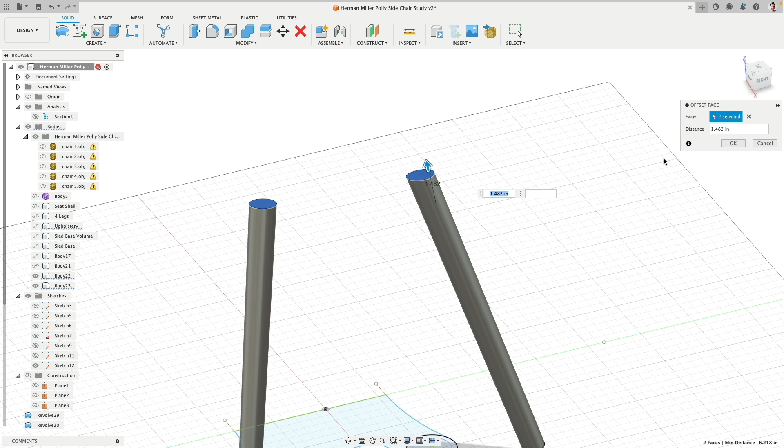These here I will extend. Why did I extend them? Well, I'm going to cut the holes now where those actually go into. Suck, suck, and keep. Thank you. And then I split by this. Suck, and then suck, suck, and delete. Ah, look at that. Plop. There we have the hole. Easy peasy, it's like cutting holes into your Swiss cheese.

Let's make a mirror command. There, repeat. There, very good.

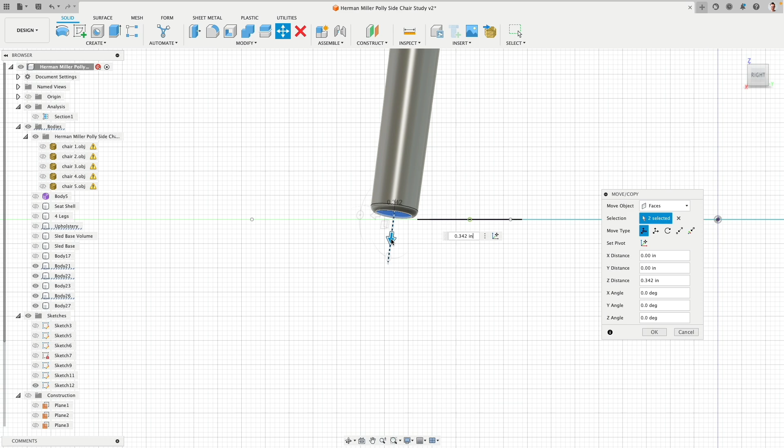Beautiful. We just realized the legs are a tick too short. They also have another piece that's stuck under it, so we could make half a dome and then position it. I'm simply going to use the move command and bring this one down. So you see how I position this, and then I select this and this, and move this face down, and then the fillet follows. There, very good. That's not an engine part.

And where is... so this is actually, let's call this wooden dowel base. Dowel master. Dowel one, actually could say front right. This is actually dowel back right, and dowel front left, and dowel... was it back left. Okay, very easy.

Let's take a look. Look at that now. You see how good this really works. It's very easy to do.

Again, I hope you notice that I don't take shortcuts, for example like here drawing only lines. I could have drawn the arcs in there, but that makes the sketch more complicated. We're not creating 2D models, we're creating 3D models. So I simply knew that that sharp corner I can later round with a fillet command, because then I can also go ahead and always adjust that fillet anyway.

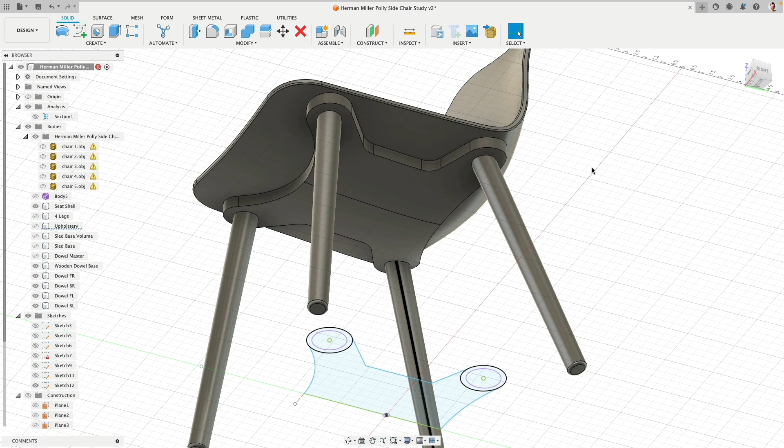It's just smarter. And also with cutting these holes, like in real life we would maybe take a knife and cut it through, but maybe I would also take some sandpaper, put this over the wooden dowel and then rotate it. So that's the reason why here I treated this base like foam, put the legs through and then cut it out. I borrow a lot simply from how I assemble or build something as a prototype in the woodshop.

Very good, so that chair is done. One left. There we are. How do we do this one? This actually looks very complicated.

It's actually very easy. We will learn here a new tool, the loft command. And if we study this, we already know this is actually an offset surface, and then we just create the sketch again. Here, this is a cylindrical pipe, and then we have this star base, which is actually a circular pattern, so I can use that tool for that. To create this blend I can use the loft command, for this rotating part I can use the revolve command, and for the offset I use the thicken command.

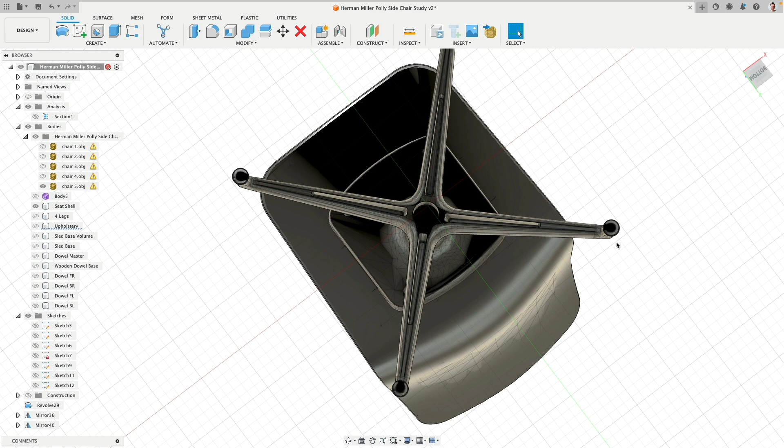Okay, very good, we're going to just rebuild a very simplified version of this design. It's actually a really nice base. Now also how they carved out areas to make this more less light, keep the sturdiness, and then this nice round shape. Anyway, how do we start first ideally?

I think the base is the easiest one. So I go to the bottom view. There we are, make a new sketch on this plane. And then here again I work smart by only putting in half of my needed sketch. There we are, I think maybe there.

We learned previously that when we want here a nice arc, I need to have a little bit of a helper to make the arcs flow tangent into those. This point I make horizontal. I can make this point horizontal, or this line is already horizontal. That's horizontal, very good. And then here's now my arc tool. There I make it tangent. I make it tangent, very good.

And then this I bring over to there. This goes back, this is good. So I fix this, push this over. This is good, I fixed that one. There's an extra rounding, so I think this is good. And then this one I bring over till here, this aligns. Yeah, this is good.

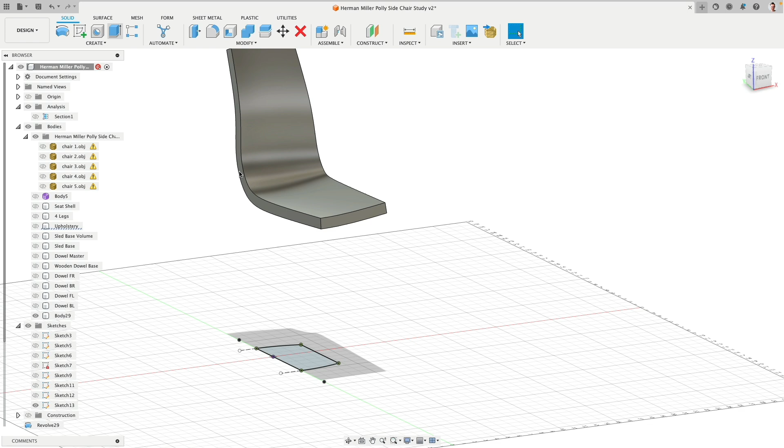This one I split first, so I have less work. Then I use the extrude command, cut this through, say intersect body, thank you. Then I can go ahead and round these edges. There we are. There's actually a little bit of a draft on it. I'm going to ignore this actually, it's a little bit more advanced.

And here I round this a little bit. How does this look? Oh, that was actually a little bit too big. Can I change this radius? Yeah, and you see actually by changing this radius, it also adjusts the other secondary fillet too. So that's actually really nice.

So right click, repeat. This is way too big. There. Right click, repeat. And there. Yeah, this looks good. Flop. Good enough for what we tried to do.

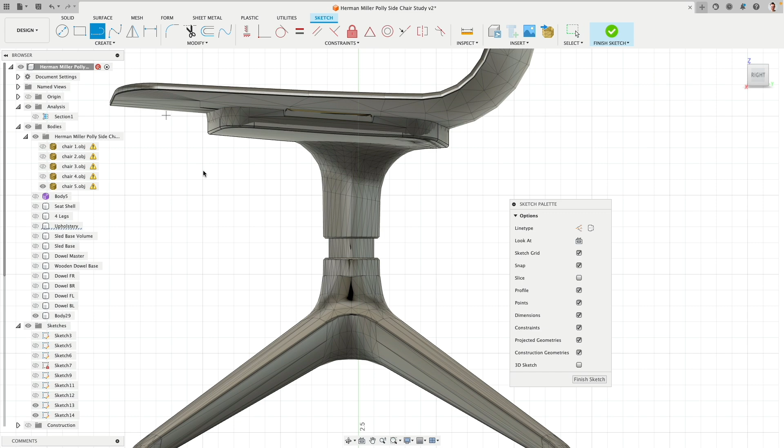Okay, so the next logical step is actually creating this piece, the center part. So I'll make a sketch. Now this is not lining up with the center, so I will go ahead and kind of imagine this is maybe where the center is. Fusion sometimes creates these artifacts. When you click your first line, it creates these tiny pieces there. Just be aware of it.

I have to clean this up actually. I bring this down a little bit to here, bring this over, bring this up, over, over, up till here, and then there's kind of like this endpoint. Escape. That piece I delete. This one I move up.

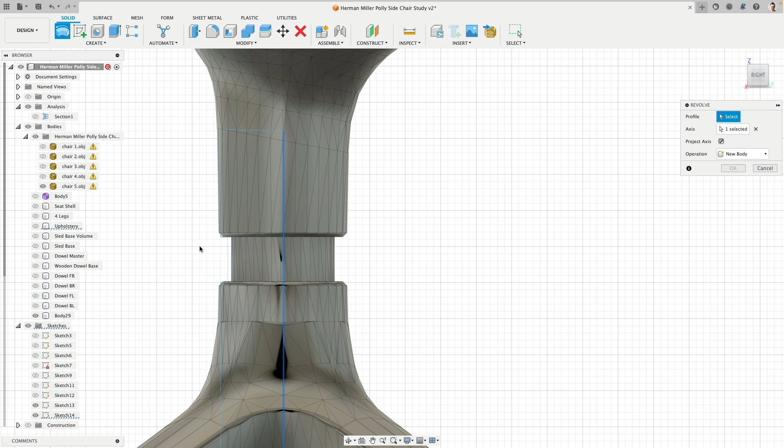Okay, I will do a quick study to see if this is actually sufficient. Yeah, it's a little bit off. It's fine. We could move the whole sketch a tick over. Maybe this one here has to move over just a notch. Yeah, this is pretty good.

Okay, perfect. So that means now this line, to prevent this to move, I lock. I want the other pieces to be nice vertical, horizontal. There we are. I want these two to be flush. So you see how I made these horizontal or vertical. Or I could also say collinear, it's exactly the same deal.

Then I will bring this a little bit further out. When we zoom in more, you see the grid gets finer. We can position this then a little bit better. Yeah. Okay. This goes in there. We can ignore this, we're just going to make a prototype.

Okay, so this piece is kind of done. There we are. This, for example, we can make a metal material later to show there's actually an inner cylinder, and then these get a different material. So how do we connect this actually to there? And that is actually pretty easy.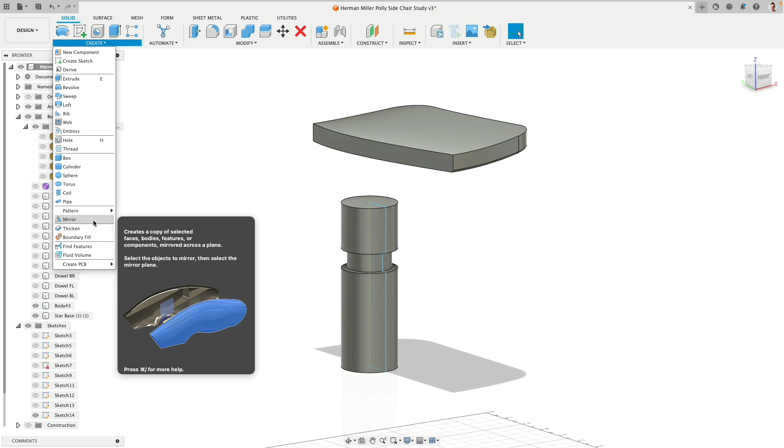First thing, what I will do is I'm going to mirror this over, so I have a full piece. Very good. And then this top plane, I will extrude upwards into this base. And when it starts intersecting, it's being joined. Because this is now one body, I can go ahead and select actually one edge and add a fillet. There we are. Beautiful. This works actually pretty good.

To style this fillet, we can also change this to a G2 curvature. G2 means it's nicer and softer the way how it flows. G1 is more like mechanical. The transition between this surface to this surface is not as smooth with G1 than G2.

The downside of this process is you see here how we get this kind of not so nice looking piece, the curve. I would like this to be more linear, and this looks pretty circular. So let me show actually step number 2.

So I undo everything and I will do something similar again. I will actually extrude this one up a little bit, but as a new body. There we are. And then I will make this a little bit bigger. And from the bottom, I'm kind of trying to pay attention to how much bigger I want to make this. Like this. That's good. Perfect.

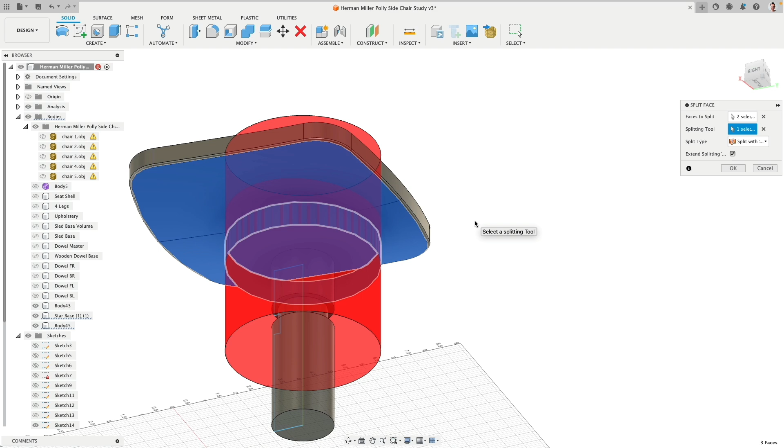So we're going now to split actually these two faces with this cylinder. And splitting basically means we take a knife and we cut a new edge into that. There you see this. So this is not split body, this is split the surface.

This little helper we don't need anymore. Now the next step is these faces I want to delete. I open it, but if I do this, you see I get the original state back. So let's actually switch to the surface command. And I go to unstitch and say unstitch.

Pay attention to what happens here. I do this now, and I have this body, and I have these two bodies, and I can delete them. Now I have an open surface model. See, this is different. This is open - that's just a surface. That's a volume.

Because we did that, we can now go to the surface command, use loft, and select these two plus this ring. With shift, I selected these two profiles. This actually lofts, as you can see, makes a blend. Also here, we can add G1 or G2 tangency.

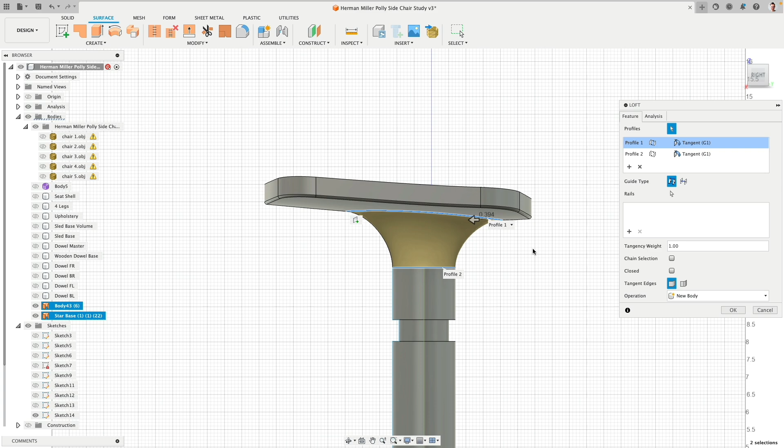With the loft, we can play a little bit more with how we want one profile to start and how we want the other profile to start. So we have a little bit more control - it's very similar, but I really control the start and end profiles. Very good, that's perfect. And then we go to stitch and stitch these three bodies back into a watertight model. There we are.

Beautiful. Okay, so how do we do now actually the star leg? This looks very complicated, it's very detailed. It's actually not really that complicated - it's very easy if you know how to build this easily and fast. There are obviously many ways, I'm showing just one very simple, effective way.

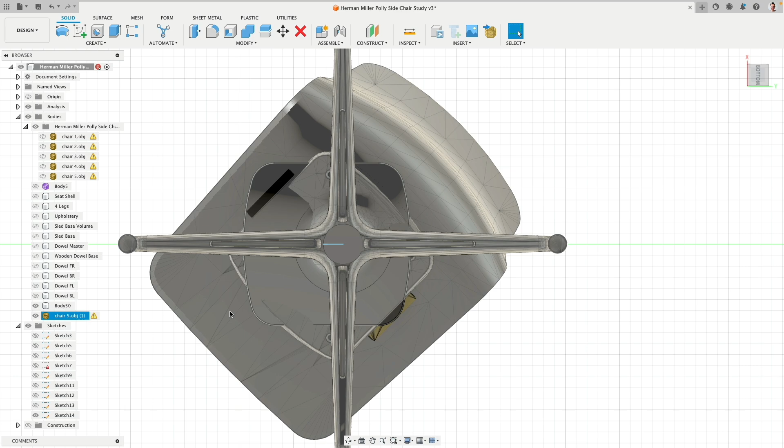First, I would like to make myself a copy of this piece. So this one, make a copy, position the pivot to there. Okay, and then I'm rotating me a copy out. There we are, this looks pretty good. So this one I can hide - this makes later sketching a little bit easier.

Actually, I just realized I might not need this. Sorry for this - actually no, I was wrong. I need this, because now if I go to a side view, you see how this leg is lined up with this plane. That's the reason why I made this.

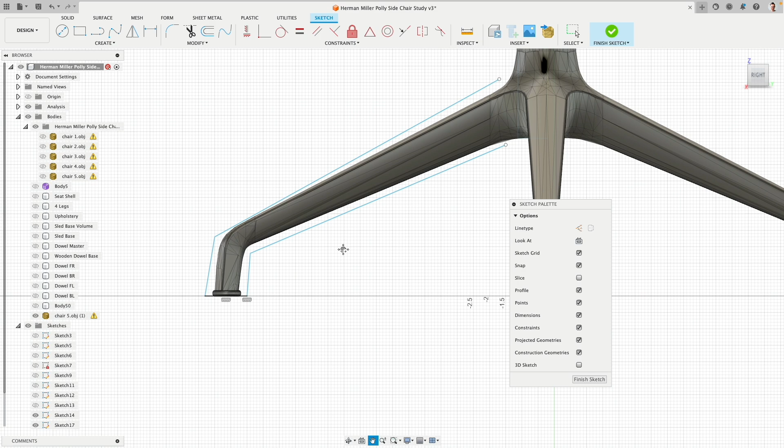So I'm going to this view because there I can see where my initial sketch for this body is. There we are. I make a new sketch on here, and then I will go ahead and start clicking one time here - this should not be angled. Click there, bring this to here. Then I start here, bring it over, bring this down onto the grid, click. First thing I want to do is make sure this and this is center horizontally aligned. Very good.

Then this point I can bring in, and this point I can bring in. This is actually good, so I will lock this point and lock this point. Escape. Bring this one in - this looks good, I think also this is fine. So I lock this, the line, and then I can zoom in here.

There, okay, and there, that is good too. Beautiful. Okay, I will hide this now - this is the rotation axis. I will project this one in, so I have a reference. So this one I connect, and then here I will draw a horizontal line so that I can, as you see, make a nice tangency connection and construction there. Beautiful, one last check - this is good.

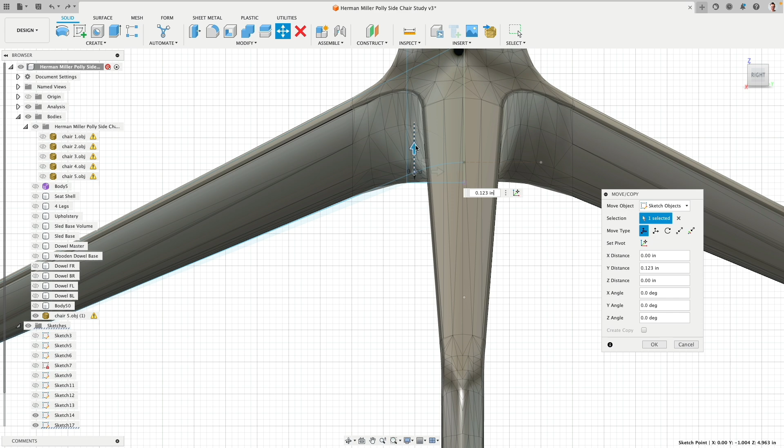Actually, this point can go up a little bit. So wait, where is this point? Is it that one, I think. Press M. Yeah, there we are. Very good.

Super duper, so what can we do with this now? We actually use the revolve command to create this. Yeah, I know this looks kind of funny, but hold on. This thing here, now we're going to round a little bit, and then we can also round this a little bit. Okay, hold on, one more time - right click, repeat. And there.

For example, very good. Now, but this is not really the star base - the star base we're going to cut now. So this is actually now where the original version comes in handy. So we make one last sketch there, and this is the construction plane. There's the grid - this goes over, this goes to there, this goes to there and back.

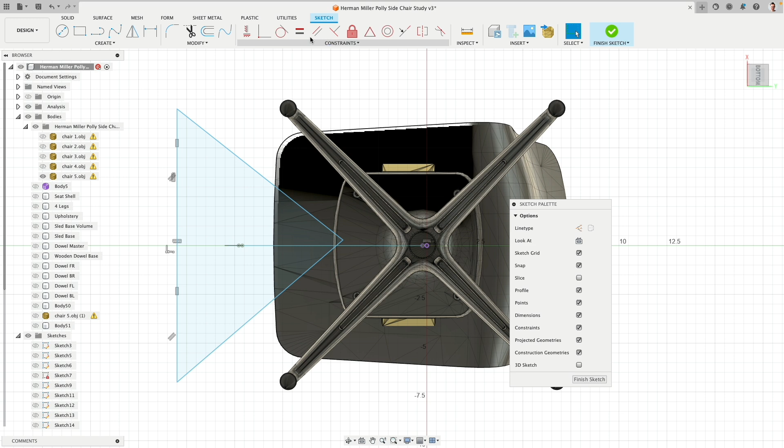This point should be centered to the sketch origin, and these two should be equal. Now I can simply - oh, I have to put this one to there too. And then you go to there, you go to there. Oh, you see it already, no? So it's like very easy - you just need to see the geometrical shapes we want to design. Perfect.

Turn this off, show this. Okay, this is way too small, so let's make this bigger. Then we're going to cut this out, but first as a new body. I want to verify that this is not intersecting, and it's not.

That's perfect. So now I can round this edge if I want to. Or I do this actually later.

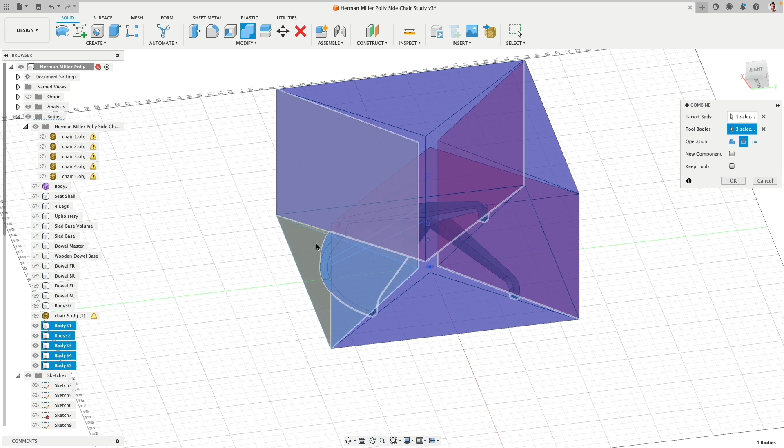So let's stop this. Now, because we have this cylindrical shape, we will go to the circular pattern, select this, and say, make me a circular pattern around this or this, doesn't matter. 4 times. There we are. Now we go modify, and from this one, we want 1, 2, 3, and 4 being cut out. Okay, there we are. Look at this beautifully cleaned up geometry.

By the way, this is version 2 of my recording because the first time I didn't pre-plan this and I made some modeling mistakes, and then in the end I realized this is actually so much easier to do. I built an individual leg and then rotated it. In this case here, we simply build a base and then we cut the openings out.

Anyway, we can now go ahead, select these vertical edges, and then round them a little bit. This looks beautiful. Right click, repeat, fillet. Then now we are rounding actually these edges because these vertical edges are rounded now. We have, as you can see, a really nice flow from one to the other side. Very good.

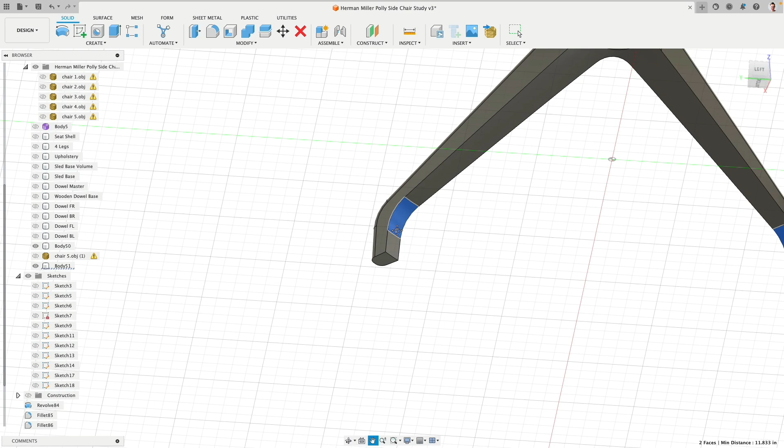These edges, these fillets are a little bit too big. Okay, yeah. I'm going to select them, so all 4 faces. Then I go to fillet.

Wah wah. I'm getting tired. Not fillet, press and pull. Silly me. So now I can go to maybe this quarter view and round this till it starts.

This is too small. This is definitely too big. I want to have a nice even material. Yeah, maybe like this. This looks better. It's not perfect, but hey, that's fine. This is just a study piece.

And same deal, because all these other edges are rounded, filleted. No, this is very easy to round the inside. Bonk. There we are. This one here, we can... how do we do this? Oh, we just move this up. Sits in there, period.

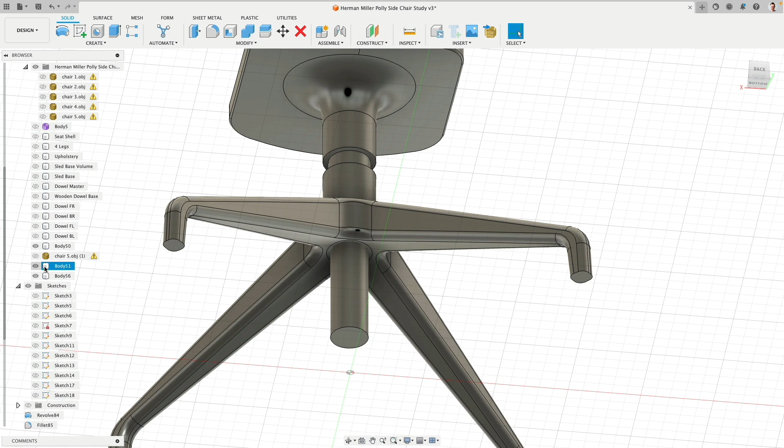Actually, from this piece, we maybe want to have later a small cylinder. So here I'm extruding a new piece out, but as a new body. And then I will make this a tick smaller. Okay, thank you. Because now I can say, so you and you, please join together. Thank you. And then I can say from you, this one, cut out.

Thank you, I see there is that base. Beautiful, I mean that hole. Little bit of a cleanup, way too sharp edge. And can call this star base. And there we are, look at this.

No? Nice and clean. So I used very clean geometry. I shouldn't say simple geometry, clean geometry, because this really made actually designing this leg very fast and easy, less complicated problems. I do have some not so nice design features. Here you see this is thinner, this is thicker. So this edge, technically speaking, needs to get lower a little bit so I could rebuild that leg.

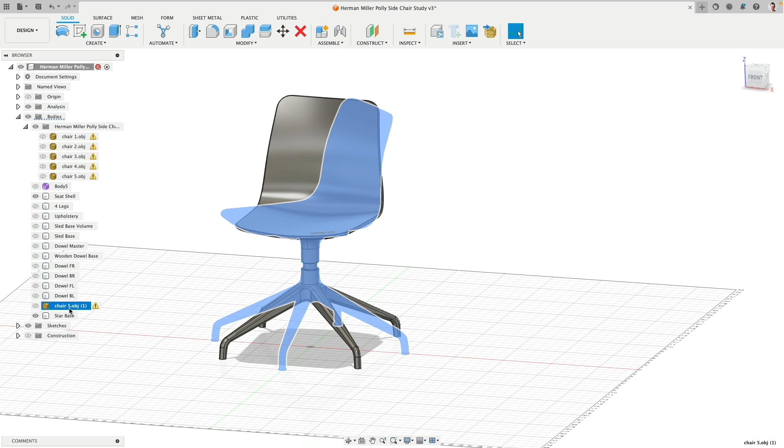That's all good. But for what we are trying to achieve here, learning how to build this is actually perfectly fine. So last cleanup, they are all the pieces dissolved. Very good. This one now, actually we could bring this to there. So it is inside this folder and nicely sorted.

And yeah, so there are actually now all our individual versions. To, if we want, make a nice presentation of this line, we actually now can go ahead and say, so

You and you, so you stay, you stay. So this one, we make a copy by how much? Let's say 18 inches. Thank you. And then, so here's the sled base. Move this over, 18. So this one, make a copy of this body. Again, 18. Whoops. Oh wait, careful, careful, careful, careful.

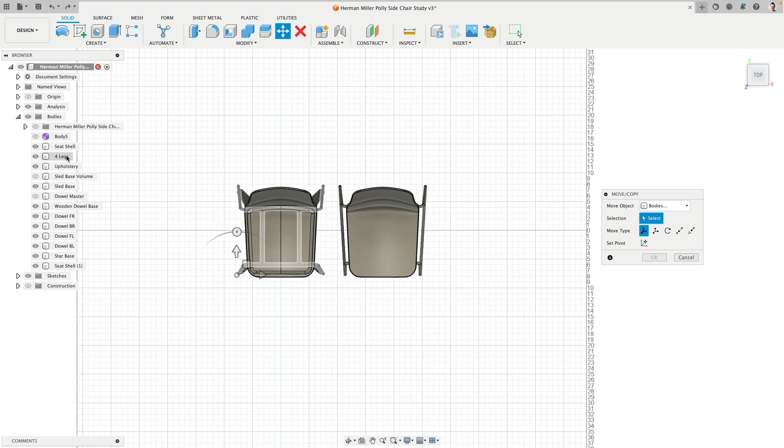So just click this one. That's safer to do. Make a new copy, bring this over. And then this is an 18 multiplied by 2. There we are. And then there's the sled base.

And then all those we can select, go to move. And then that is 18, so 32. No, 36. Yeah, very good. First grade math didn't fail me. And then here comes the last one. So here, this one, there, make a copy along the x-axis. So this is actually 18 inches multiplied by 3.

Very good. And then this one, x-axis, 18 multiplied by 3. Beautiful. Let's turn actually this layout grid off. Take a look at what we have. House looks actually really nice. It's good. Perfect. And we are done.